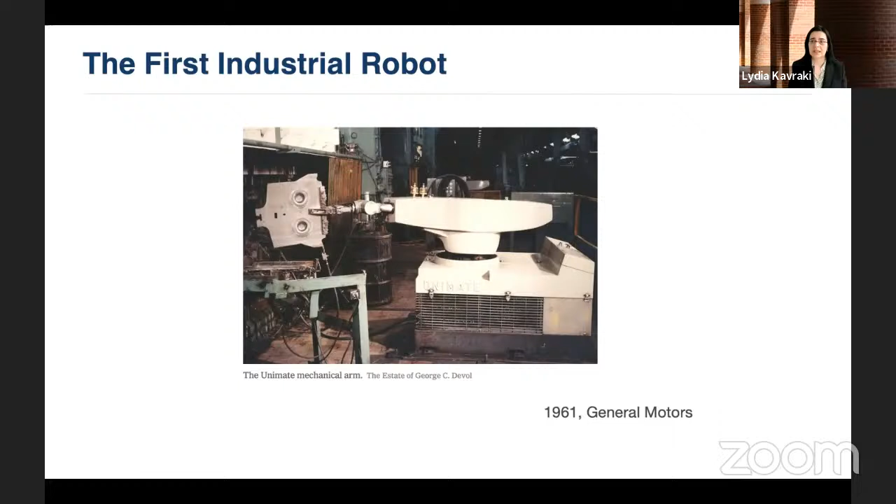However, the concept of automata is a very old one, about 3,000 years old. In the Iliad, Hephaestus, the god of metalworking and fire, created automatic tripod carts to deliver nectar and ambrosia to the gods and goddesses on demand.

Talos is also attributed to Hephaestus. A mechanical colossus made of bronze was imagined in the Argonautica. Talos patrolled the shores of the island of Crete, throwing boulders at invaders.

In his treatise Automaton Making, the mathematician engineer Hero of Alexandria describes a fully automated puppet theater that through a combination of displaced grain, axles, levers, pulleys, and wheels could enact an entire tragedy.

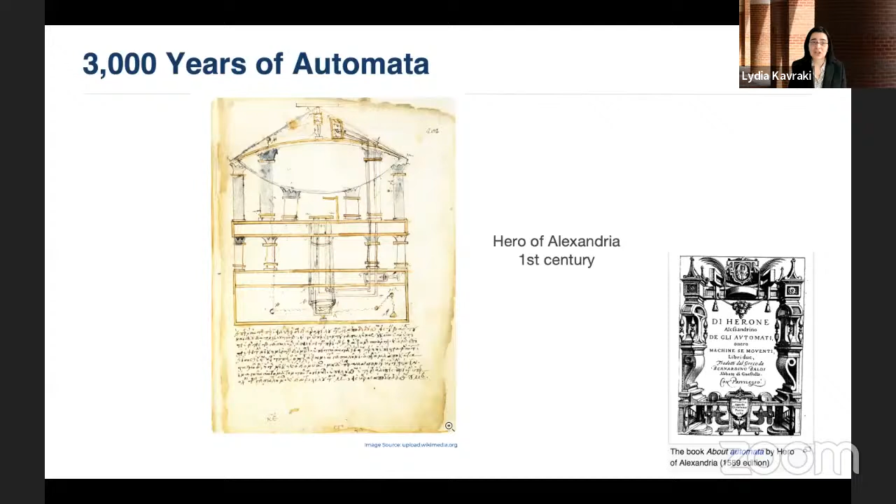Fast forward to the Renaissance, Leonardo da Vinci drew up plans for a robotic knight operated internally by weights and pulleys. In the 20th century, when industrialization became a reality, the word robot was coined in the 1920 play RUR, Rossum's Universal Robots, by Czech writer Karel Čapek.

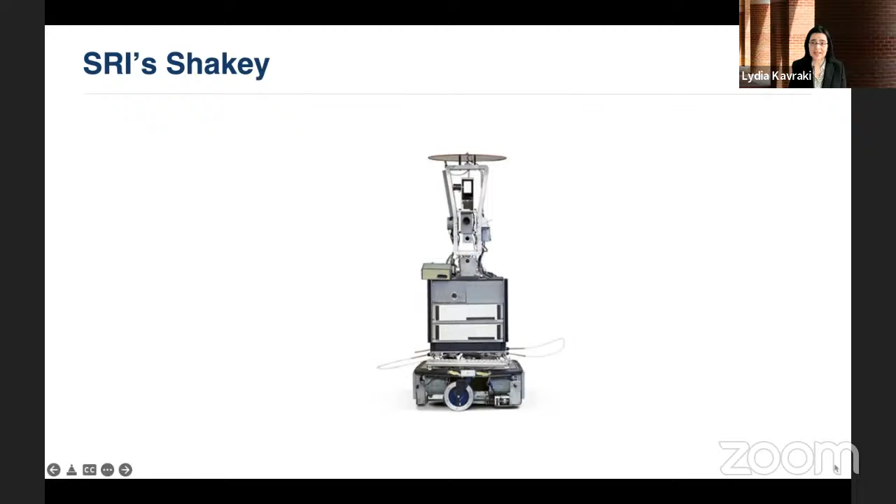Shakey was the first mobile robot with the ability to perceive and reason about its surroundings. The subject of SRI's Artificial Intelligence Center research from 1966 to 1972, Shakey could perform tasks that required planning, route finding, and the rearrangement of simple objects. The robot greatly influenced modern robotics and AI techniques, and now it resides in the Computer History Museum.

Today, robotics is one of the most disruptive technologies. Robots have already made great inroads in the automotive, semiconductor, manufacturing, and fulfillment sectors. Robotics is now poised to transform virtually every societal sector, including national security, agri-food, maritime, environment protection, infrastructure inspection, emergency response, logistics, transportation, healthcare, entertainment, and the arts.

So the transformative power of this technology has prompted several reports and roadmaps in many countries, and I will encourage those of you who are interested in the topic to have a look at them. From Internet to Robotics, a roadmap for US Robotics 2020 edition, followed earlier roadmaps in 2013 and 2016 in the United States and was a collaborative effort of several roboticists from academia and industry.

The Robotics in the AI Era, a vision for a Hellenic robotics initiative executed under the auspices of HIAS, the Hellenic Institute of Advanced Studies, which co-sponsors this webinar, speaks more to the Greek idiosyncrasies and reality.

From the HIAS report, I quote, "The global robotics market was valued at $62 billion in 2019 and is projected to reach $189 billion in 2027, growing at a compound annual rate of 13.5%. The market grows to 15.7 trillion by 2030 if artificial intelligence is considered."

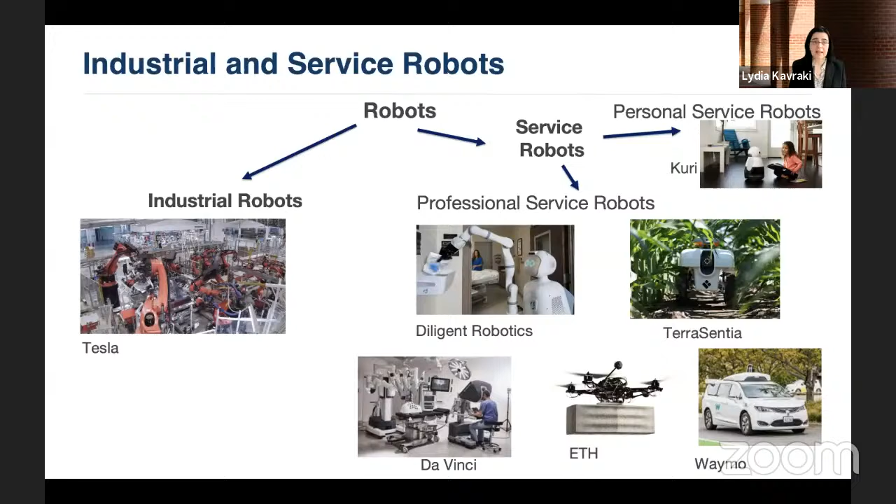Again, from the HIAS report, contrary to industrial robotics, which is rather mature, the service robotics sector, unmanned aerial vehicles, healthcare, logistics, and agri-food robotics is in its infancy and fast rising. Professional service robots is a 27 billion market worldwide and is growing at an annual rate of 30%. Furthermore, 20% of all service robot companies are young startups. This creates an exciting opportunity for aspiring Greek innovators to enter this young and fast-growing field and modernize the economy towards Industry 4.0.

In this very short webinar, we have asked outstanding Greek scientists of the diaspora who work in robotics to give us a glimpse of their work and the things to come. We have also asked the Greek technologists and leaders in the industrial sector to discuss their efforts in Greece. We focused on advancements in aerial robots with talks by Alexis and Dimitris Stefanakis, autonomous vehicles with Margarita Chli and Katerina Fragkiadaki, social and rehabilitation robotics with Panos Artemiades, robots used in agriculture with Stavros Vougioukas, industrial robotics with Evangelos Theodorou, and underwater vehicles with Michael Triantafyllou.

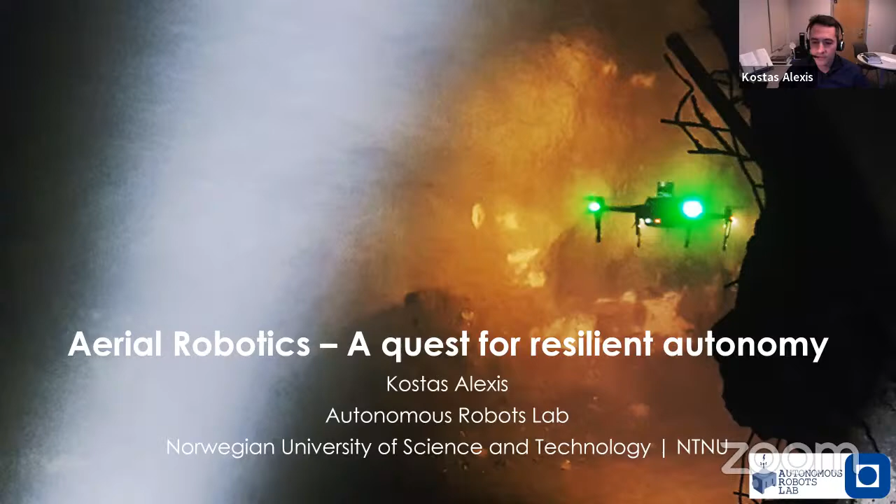I'm going to discuss aerial robotics, and I'm going to make the claim that the key aspect, and I think Lydia before outlined this also, the key aspect for service robots of that type to be ubiquitous relates to a set of challenges, and the part of the work that I'm going to focus on today is how we enable autonomy and a resilient autonomy in these conditions.

Flying robots are now employing diverse configurations, from classical multi-rotor systems, as we are all familiar with now, what we typically call a drone, to fixed-wing systems with long endurance, custom designs specific for industry, and so on and so forth. But they are tasked to operate in very diverse and challenging conditions with perceptual degradation and other limitations that hinder the ability to operate autonomously.

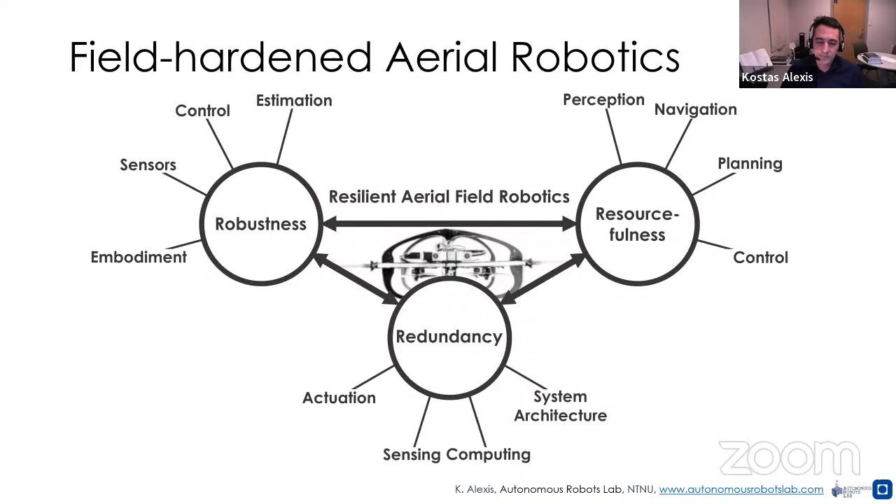If I was to make a plot of what aerial robot autonomy relies upon, I would say it has to have three features: robustness, in terms of having the same performance across conditions; redundancy, in terms of actuation, sensing, and being able effectively to have the ways to operate against every error and in every condition; and resourcefulness, in the ability to find a solution despite the challenges faced in all the other loops and functional subsystems.

It's massive. But they also have low texture and visual obscurance. They can be dark, they can have smoke, they can have dust, and so on and so forth. There is no access to communications. So we're really talking about autonomous systems. I'm going to present the main part of the work that relates to our contributions, but the whole context is made through a large team and international collaboration that involves many partners.

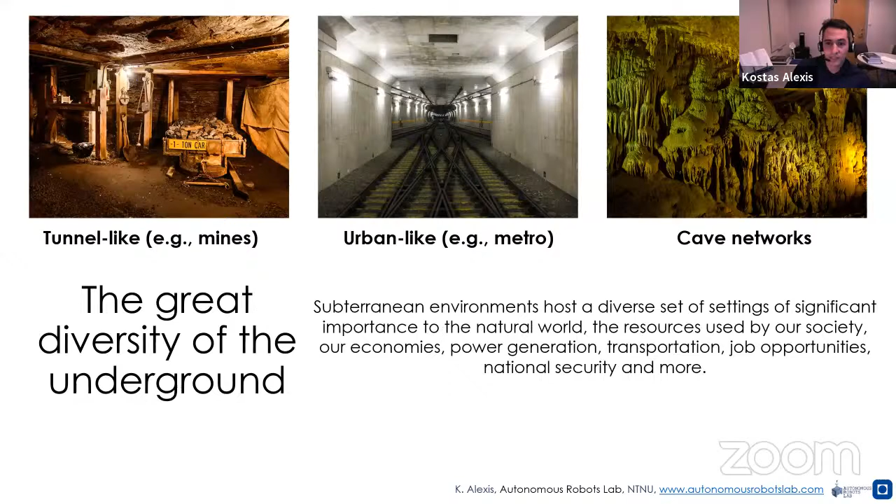And the name is inspired by ancient Greek mythology, so it's called Cerberus, by the protector of the underworld. I got to know through this endeavor that actually underground domains are particularly important for the world and the society, and also very diverse. So we have tunnels and tunnel-like environments such as mines that give us the resources, urban underground infrastructure that allows us to transport, and of course, the magical world of cave networks.

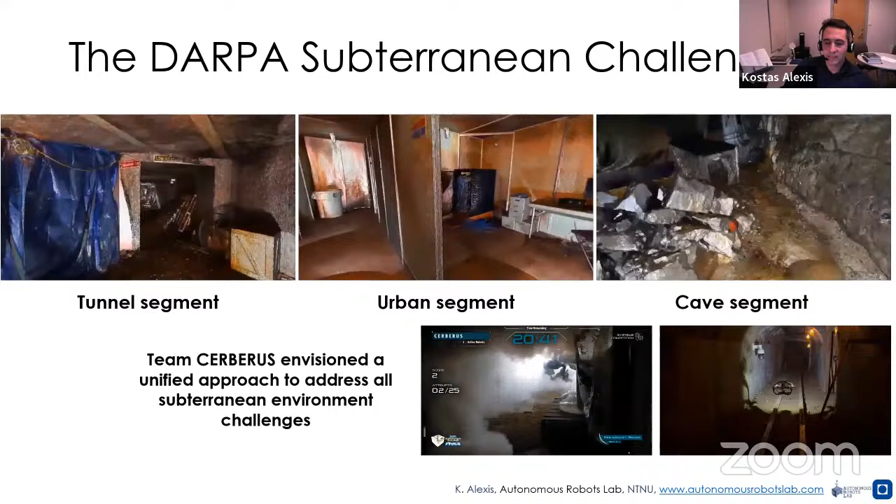DARPA, the US Defense Advanced Research Projects Agency, implemented a challenge analogous to the previous, like the DRC and the Urban Challenge, where robots had to explore and map and find objects in this type of diverse environments. In the final event, teams were tasked to explore parts that look like an underground mine, parts that look like an underground urban environment, and parts that were part of a natural cave. And we deployed a system of systems involving flying and legged robots. Legged robots were based on our collaboration with the team from ETH Zurich.

To approach the problem, and we think it's necessary, and this is what I want to coin here, you need to perform holistic research across the domains of dexterous design of robotic systems and agile flying robots, resilient perception, resilient autonomy, alongside the remaining task-specific work such as detecting objects or enabling, of course, communications throughout. That's a picture of the systems we deployed in this competition. And again, I focus here on the flying part, although the legged robots played a particularly important role at the final event of the competition.

Flying systems, speaking in terms of what are the core challenges, I think there are three. The embodiment has to be resilient, perception has to be resilient, and autonomy has to be resilient. A key aspect in our experience that allows for resilient embodiments is to make a design that is forgiving to last resort errors that can always happen. For example, that in a very confined environment, we can always collide a little bit with the world. So collision tolerance and other compliant designs are the means to facilitate such resilience.

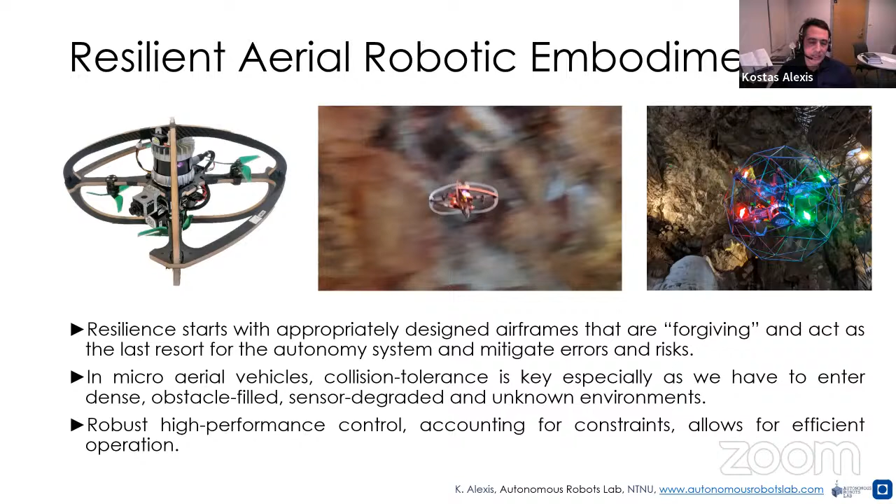And if such a design is available, then we can build upon the more important functional autonomy loops that allow it to operate on its own, search, characterize, and explore unknown environments. These are some instances from previous robots of my team. People, of course, traditionally have worked for a long time on control systems, flight control for these systems. And in my team, we employ a particular methodology called model predictive control.

But very recently, we ourselves and many other colleagues have explored the potential of implementing and designing a control policy directly from data, allowing the system to directly also avoid the obstacles in the environment without having to undergo the intermediate representation of building a map, which allows us to be particularly reactive and navigate with safety in an environment, even in the absence of complete localization information, which is what this little video on the right demonstrates to you.

Beyond control and embodiment, I mentioned perception is a key challenge. GPS-denied navigation is something that colleagues in the research community have explored heavily, either using LiDAR sensors or visual cameras and so on. My focus the last years on this topic related in particular to what we call perceptual degradation. And what we faced in the Subterranean Challenge, but also in other conditions especially relevant to industry in the real world, is that robots do not operate in environments that are benign with simple features and good visual conditions, but they can be simultaneously GPS-denied, dark, low texture, with smoke and fog and mist, geometrically self-similar, multiple kilometers in size, but at instances extremely narrow.

To allow resilient localization and mapping based purely on onboard sensor data for flying robots, we have developed a multimodal localization and mapping pipeline that first of all implements the sensors, which is a lot of effort in the hardware, as Lydia mentioned, to miniaturize everything for a small flying robot, to be able to see through degraded conditions. And here you see the benefits of thermal navigation, where the robot is unaffected by the presence of strong clouds of dust around it.

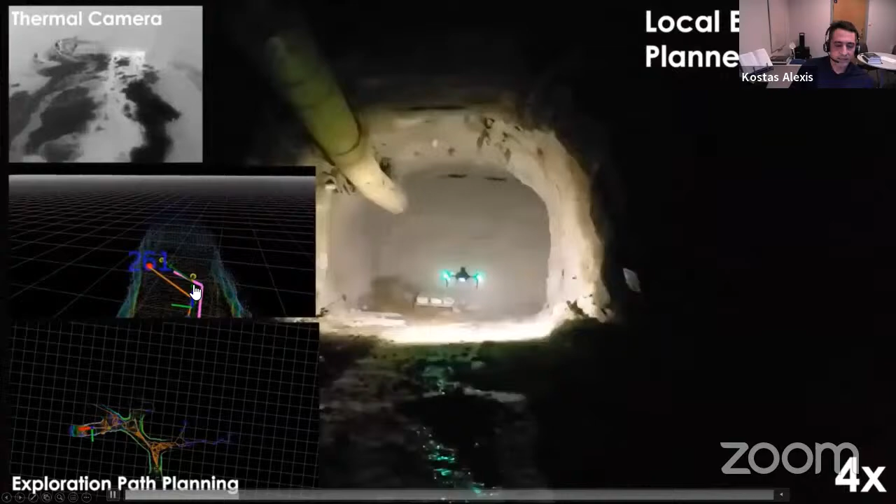These are instances of these results where you see one of our flying robots exploring an underground mine in Nevada. And you see the thermal data and the visual, and the LiDAR data. And these pink paths are the paths that the robot has identified to navigate on its own in order to explore the remaining of the environment. And the robot eventually, by the end of the battery life, makes sure to come back to its origin and deliver the data to the people that wait for it outside the underground mine.

This methodology in perception and in path planning was the core, the autonomy core of Team Cerberus, and in the final event of the DARPA Subterranean Challenge allowed us to win the competition, a result that I'm proud of, not for myself mostly, but for my team as a whole, which managed to compete and win against teams from NASA and MIT, Carnegie Mellon, and others who had an inferior score in the last stage of the competition. And this was truly a big challenge for systems walking or flying to be resilient and autonomous throughout. And it involved 3 challenges with different geometries at any time.

In this map that allows to see the whole picture, you see 4 robots with 4 names, Cerberus, Chimera, Camel, and Cayman, taking paths in this complex underground topology and exploring these worlds. And eventually they deliver the map, but also the location of objects of interest in this map. And just for what it's worth, getting a point in the competition related to detecting an object correctly, reporting back the location with an error of up to 5 meters. So it was a task about navigation in austere conditions, mapping and detecting objects of interest.

And the combination of walking and flying reflected the fact that ground systems, of course, have endurance, walking systems have dexterity against some terrain, but at the end of the day, when you have to go vertically up, get the bird's eye view, you also need the flying systems together. So that was a team that involved multiple robots, and this is the whole combination of robotic systems that Team Cerberus deployed through the 3 years of the competition.

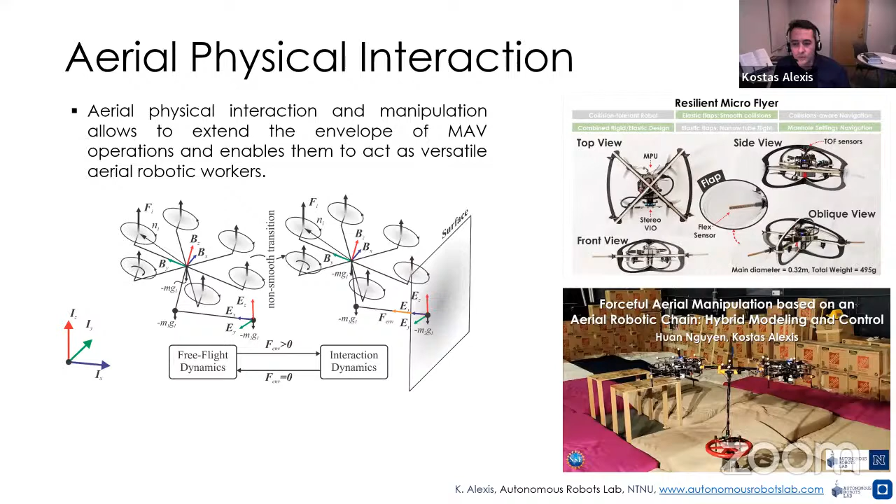I want to close my talk highlighting that remote observation and mapping or search for objects is one thing that flying robots can do. It's really not the only one. And what you see in these videos is that we can, of course, exploit physical interaction to navigate through very confined environments.

We are recently running a project that allows us to go through very narrow manhole settings where a human actually is able to navigate by just squeezing his shoulders, or to manipulate physical objects in the environment with a flying system. This is maybe not the most conventional application, but actually, if you think about it, it's very natural to the natural world, with birds, of course, being able to manipulate and interact with their environment.

And of course, beyond small flying systems, I have to give credit to the period of the research that I was at ETH, together with my team back then, when with traditional fixed wing designs, glider, we demonstrated the ability of a system to fly during the day, charge its batteries with solar panels, and sustainably cross the night, and then fly the next day, and fly the next day. And eventually we call this the idea of perpetual flight.

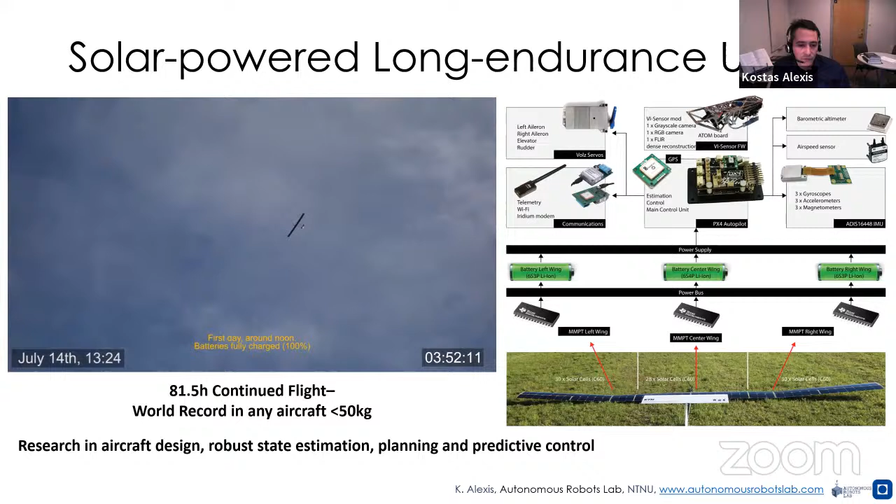So this robot that you see here, 5.6 meters in wingspan, 6.5 kilos in weight, demonstrated in 2015, 81.5 hours of continuous flight, which is still the world record for anything below the 50 kilo class for an aircraft. With that, I want to highlight that an important aspect is to try to push the community as a whole. So we try to open source a lot of our work, and many of our colleagues today, I think from the talks, also work in this direction.

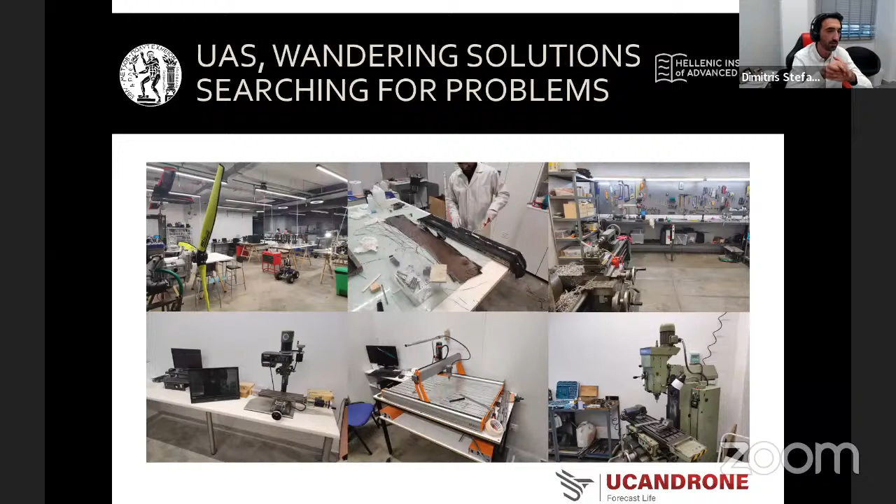Of course, as the Professor says, we are a vertical production line company, building and manufacturing, programming and designing advanced systems, and of course service providing, meaning that usually we have calls from professors like Mr. Kyriakopoulos asking for whatever payload or a pH measuring device or a thermal camera or whatever sensor robot, and the only valid answer that we can offer is, okay, Professor, what color do you like? This kind of work gives us opportunity to fly almost all over the world and be part of this unmanned system hype, if you like.

The committee challenged us to investigate and present the uprising challenges and of course opportunities coming along the digital transformation and AI in robotics. And the first thing that came into my mind is, oh my gosh, I'm heavily jealous and fond of all the students that we are speaking for today. They have the chance to see their work come to life and take action in everyday usage. And I think for sure there is no time like present. That's why I called this presentation the Wandering Solutions for a reason.

In my area of expertise in the last 3 or 4 years, we are searching problems or clients, if you like, to propose our drones as panacea. And that's why I didn't want to wear the tinkerer's hat today, but I really liked to give a business development aspect of these opportunities. So silly guys like me love to explain stuff in a history manner. Thus, I only have 8 minutes or so to explain the evolution of robotics from a business aspect and how all these thoughts come together, and I hope you might find it useful.

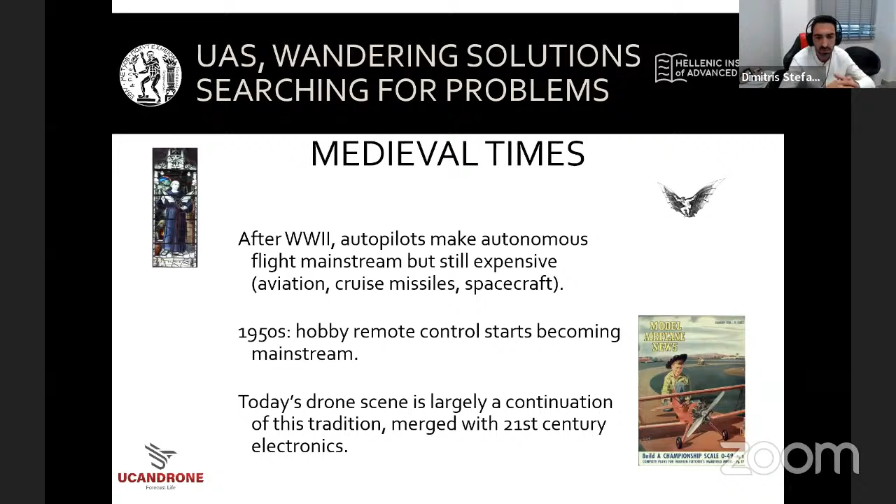But after that, we have some medieval times where, after the war ends, the remote control hobby came mainstream. And actually, if you think about it, today's drone scene is largely a continuation of this tradition, but with better electronics, of course. Like every history, we have the Renaissance.

In the 90s, GPS came mainstream. We have the mobile phone hype, and of course, the internet maybe facilitates the open source movement, or at least I can send a colleague of mine a message and they can answer. But we're not there yet. Why? Because we have the age of enlightenment, and of course, we can get hands-on some real energy.

Because of the battle of mobile phones, we have inertial and other sensors and GPSs that are small enough and cheap enough to use. And for the first time, last but not least, we have processors that we don't use for heating ourselves, but they can actually process.

So around 2005 or 2009, somewhere in the middle, we start having all this hype about drones and all this open source initiative for flying drones, for USVs or UXVs in general, that we can play with and use or make a hobby out of them. And of course, academia embraced them and started to use them a lot.

So as I said in the beginning, there is no time like the present. Nowadays, we can get hands-on with whatever device you can imagine. You can have sensors of any kind, and you can just imagine a solution and make it the other day.

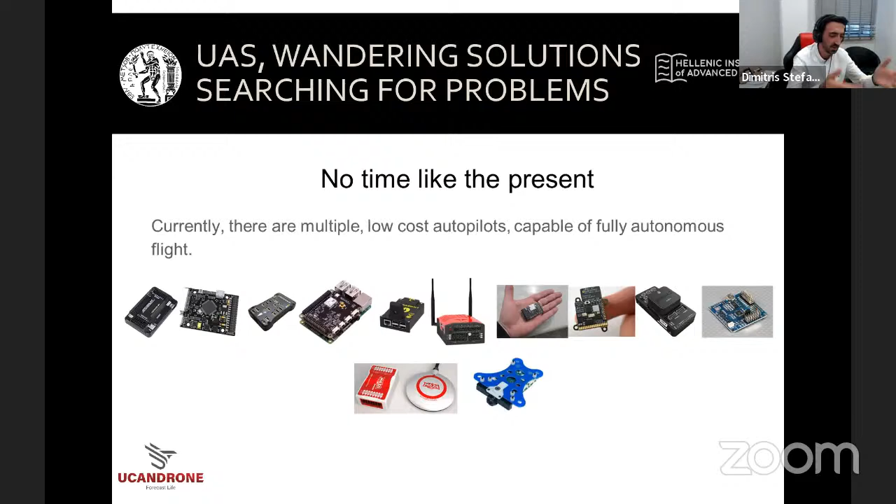But after all this perfect storm, after this 'there is no time like the present', we sat down and started narrowing down to the tool, not the solution. We heard about coding, AI and buzzwords like machine learning, etc. So we narrowed down to the code or something, or we said, of course, we need more miniaturized electronics and better sensors, etc. So we started to narrow down to this aspect.

Or guys like me said that, okay, all of you can't do anything if you don't have a beautiful, shiny platform like mine. And everybody looked at his discipline without looking at the solution. And once we found this panacea, we handed it down to everyone who's willing to pay for it. So this gets me to my favorite slide.

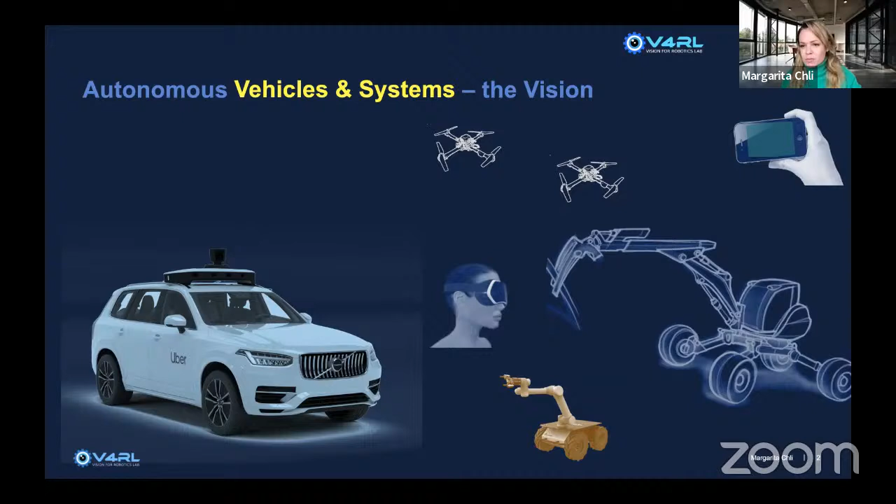And at the Vision for Robotics Lab, we are aiming to basically use the onboard sensors and the onboard computation in order to automate their navigation in space. So we want to develop this robotic perception and intelligence for platforms such as the ones that you see here, in order to enable their safe navigation in space without colliding with their environment and actually performing a useful task.

And the vision would be to take this a step further, even to have a portion of this team, or all of it, if you would like, to collaborate in a team to perform a common task together. Now, again, a team like this or a sub-team of such platforms, you can imagine that it can be very helpful for different tasks. Whether one wants to digitize an archaeological structure, to have a team to help in search and rescue, or to inspect the power plant or monitor crops, then robotic perception and systems can have a lot of impact and have a lot to offer.

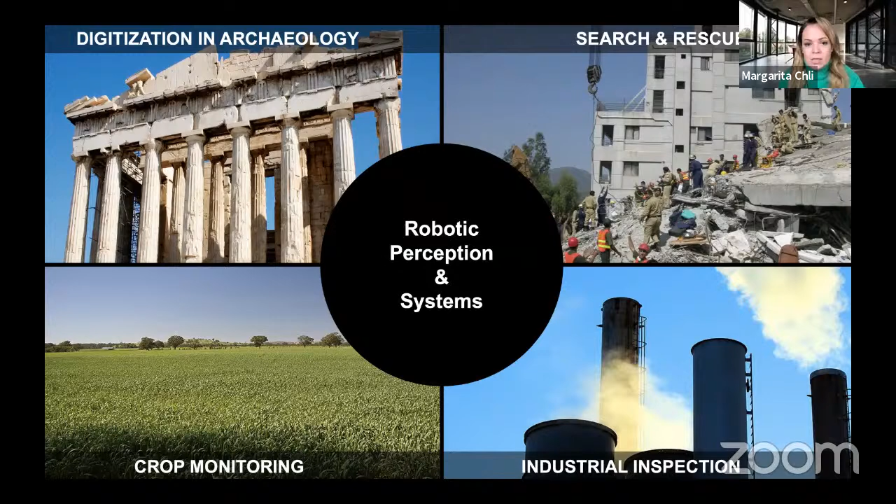So back to our vision. So in order to achieve this vision, to have a team like this that is able to assist us in tasks as the ones that I showed before, then we have quite a few challenges to address. And for the purposes of this talk, I've partitioned these challenges into three main topics, basically. And these also represent the three main research streams in my lab. So I'm going to go through them and explain what I mean by these challenges and give you a taste of some of the works that we are doing to address them.

Right, so what do we need for our autonomous vehicles and systems? First of all, we need them to be able to robustly estimate their ego motion in space, and also estimate what this space, what this scene looks like. Then we want them to build on top of that a level of intelligence, if you'd like, to perform scene reconstruction such that they can interact with their scene, and also path planning in order to perform a mission like drive from A to B autonomously.

And once we have robots able to address challenge 1 and 2, then we would like to exploit the fact that multiple robots might be deployed to perform a common task in order to do multi-agent collaboration, okay? Right, so let's look a little bit into what we mean with ego motion estimation. I'm glad most of you have knowledge of Greek, so you can understand what ego motion means just by reading that.

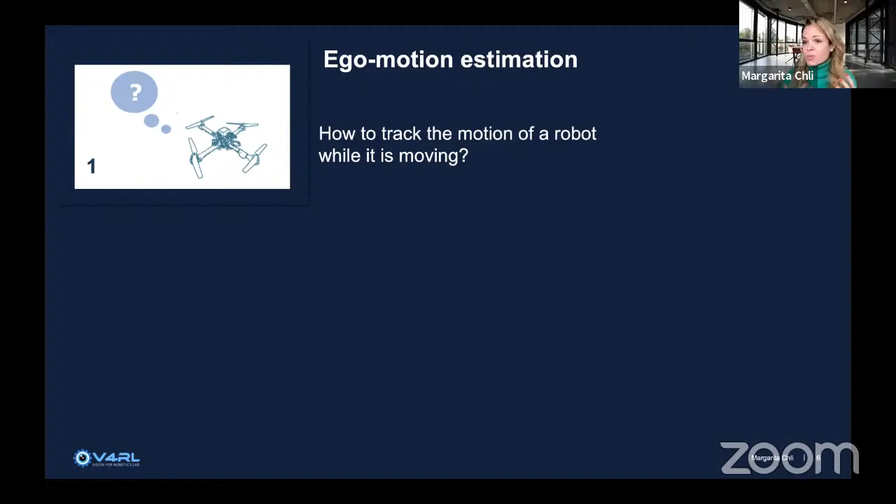But the main idea is how to track the motion of the robot while it is moving. And when you pause and think about this for a minute, you might say, you know what? I know what I'm going to do. I'm going to strap my phone on the robot that I want to track. I'm going to switch on my favorite Maps app, and I'm going to keep tracking where my phone, and hence my robot, is within this map, right?

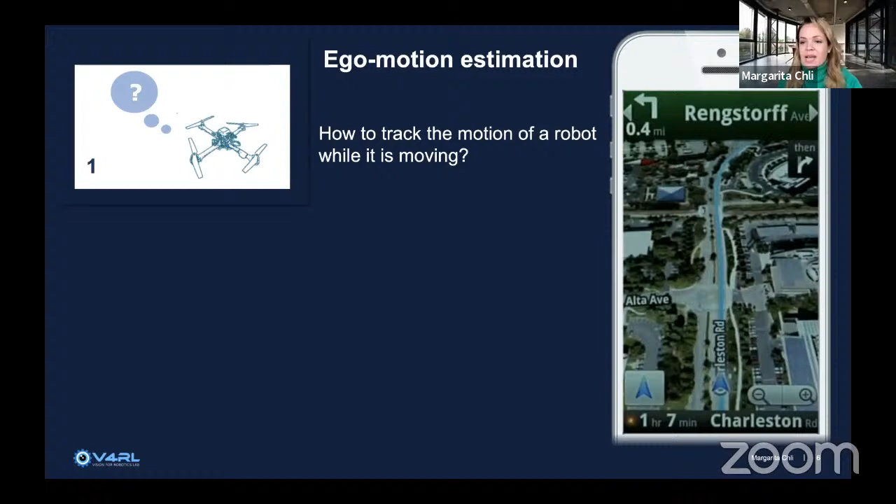But of course, this has quite some assumptions underlying there. So for example, we assume that we have a good localization estimate and a good estimate of what that map looks like. And of course, you guessed it, we cannot always rely on a good localization system, for example, indoors, and we cannot always rely on a good map because the world changes, buildings get demolished, new ones get built, right? So how do we do this? Well, we use onboard sensors, and I invite you to think about the sensors for the moment, or the rest of this talk if you'd like, to be a camera.

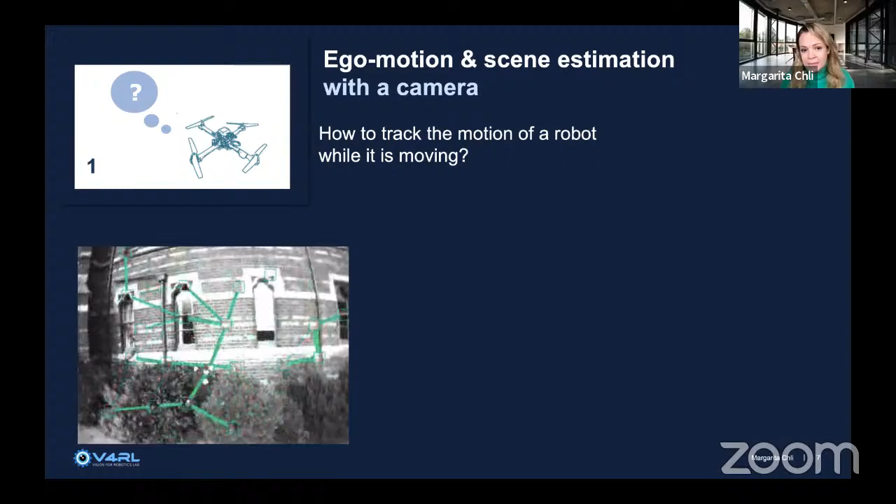And the answer is that typically in the robotic vision community, we pick natural scene features, these patches that you see here on the left, to serve as landmarks in the scene. And judging how these patches, how these landmarks move in image space from one image to the next, we start reasoning about the motion of the camera and hence the robot in 3D, as you see there on the right. And we call this task simultaneous localization and mapping.

And for short, in the community, we refer to this problem as the problem of SLAM. And that's exactly our first challenge: how can we robustly perform SLAM for our robots? So here is an example, and now, my God, this work is 10 years old. It's the first time that we were able to show that we can automate the flight of a small aircraft like this using a downward-looking camera and an inertial sensor.

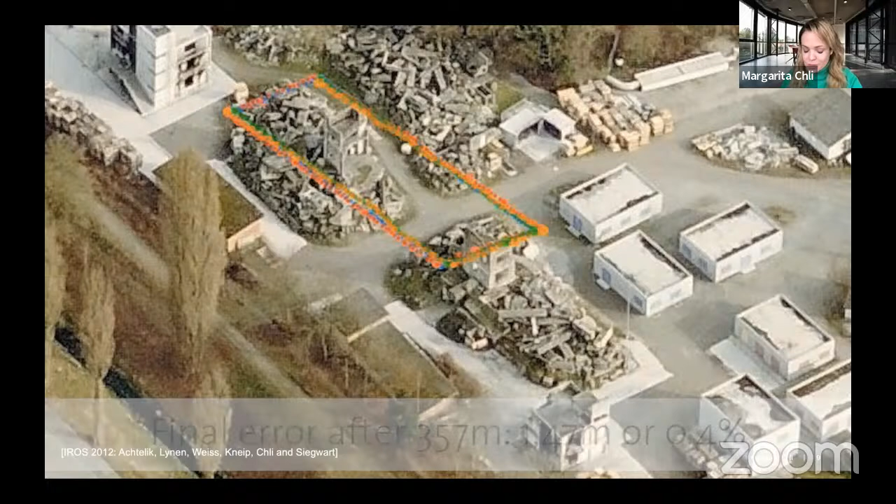So here you can see the view. The map that the robot is building is very different from your typical maps that you use in your favorite apps, but it's enough to localize where the robot is and how it is moving in space. Now, in order to capture a video like this, there has been a lot of tuning happening, which brings me, of course, to the point that while we can see a very nice video like this, autonomy is still a big challenge. And for this reason, we resort to different research directions. One direction is to experiment with different sensors.

For example, event cameras. Event cameras are inspired by human vision, by biological vision, if you'd like, and they capture changes in the intensities of an image. And what is great about them is that they can give us an insight into what happens in between traditional camera frames. They don't give us frames, they give us events, just to tell us where these little pixels are changing in the image. So if I was moving in my video here, you would be able to see just the boundaries of my figure.

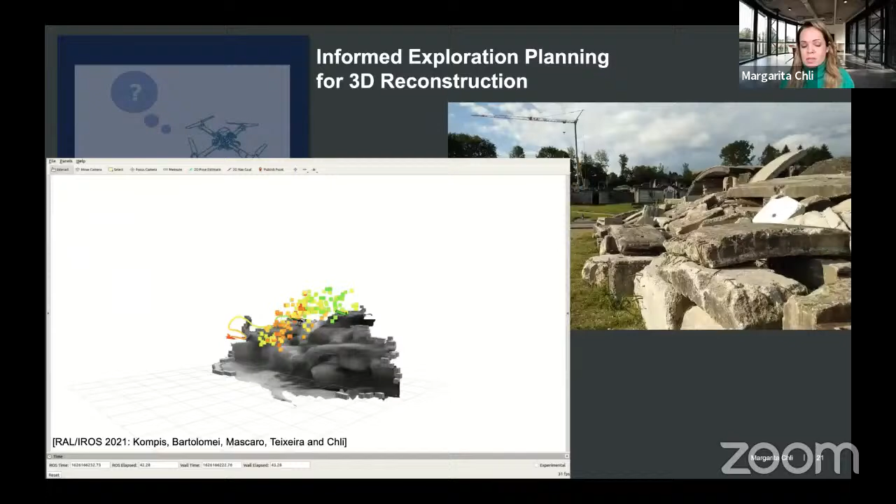And it is with maps like this that then we can run automation, path planning missions, like what you see here. So in this example, the drone is tasked to cover, 3D reconstruct the area that it is looking at, and the squares that you see there in different colors are evaluations of poses in the surroundings of the drone that we believe will be informative. And let me share with you a little bit of an insight into how this works.

We present a path planner for 3D reconstruction of large scenes for an MAV equipped with a gimbal-actuated camera. Potential next best views are sampled from the MAV's configuration space and ranked by their expected information gain. The information gain of a proposed viewpoint is calculated with a raycasting operation and encodes visibility of frontiers, visibility of unknown space, as well as quality improvements of the reconstructed surface.

So with works like this, we're able to push what we can do in terms of quality of reconstructions, but also speed of reconstructions. And within the same umbrella of trying to build more intelligence into our robots, we also use semantics. We can also use semantics when driving a robot from A to B, for example, to avoid areas that can be difficult for a robot to perform its estimates of ego motion and scene estimation.

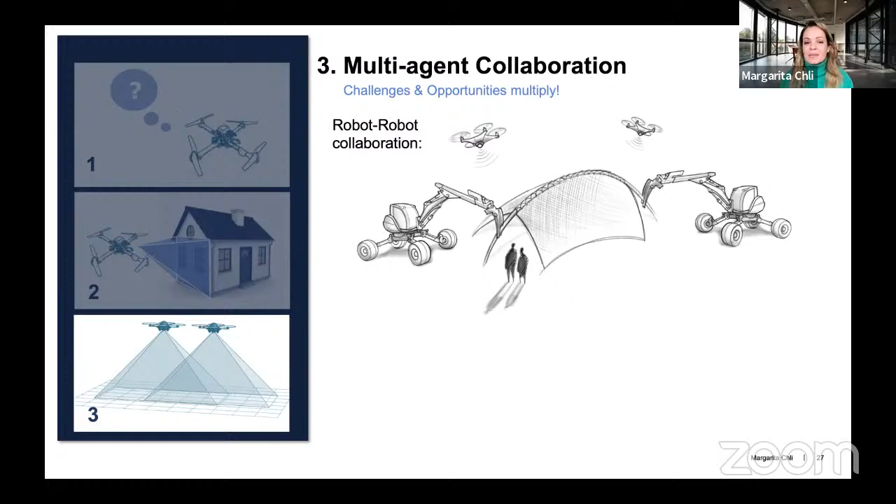And when you think about multi-agent collaboration, where we're going with this, sky is the limit, right? So you can think about robot-to-robot collaboration, as we've seen with drones in this video, or human-to-robot collaboration to perform tasks together. And I argue that with these three challenges, we're aiming to push robotic perception and collaboration, because we believe that these are key to pushing robotic autonomy.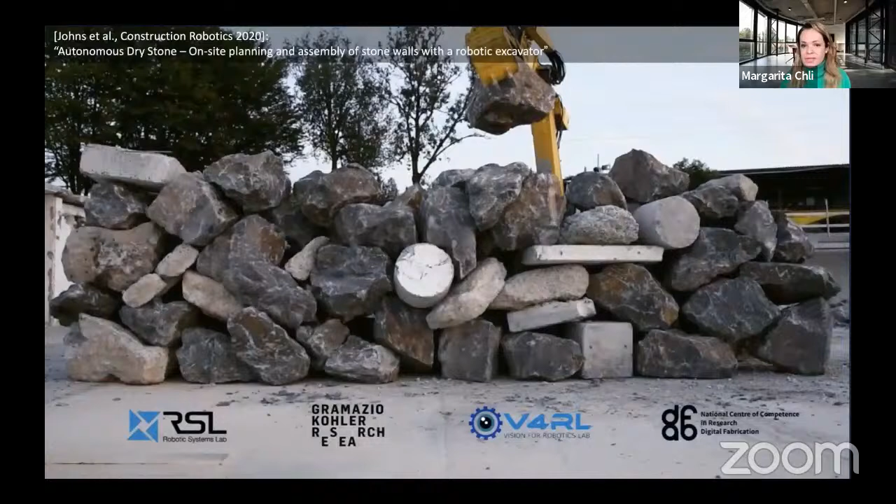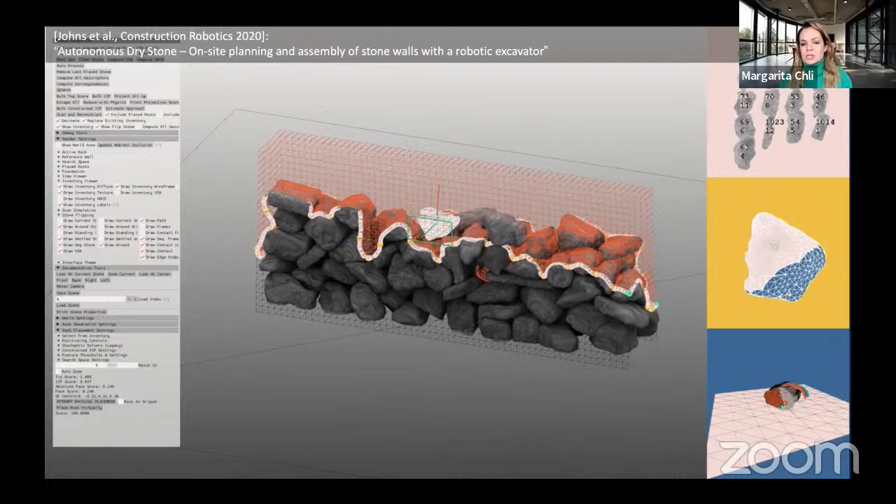And I have one last video to show you with this autonomous excavator. I think it's pretty interesting to see. This is a joint effort by roboticists and physicists and architects. We joined forces to use basically an autonomous excavator equipped with lidars and cameras to build a wall out of locally sourced stones like these. So we are scanning the environment, and then we're using a physics simulator running in the background to figure out how to place these stones such that we're able to build a freestanding wall using this autonomous excavator.

And within the course of several days, we were able to build a wall. You're going to see it in a minute. It doesn't look very nice, but I think it's interesting to see what robotics can do, what robotic autonomy can do. And imagine having had two robots able to build this, right? All the challenges and opportunities that would have to go on there.

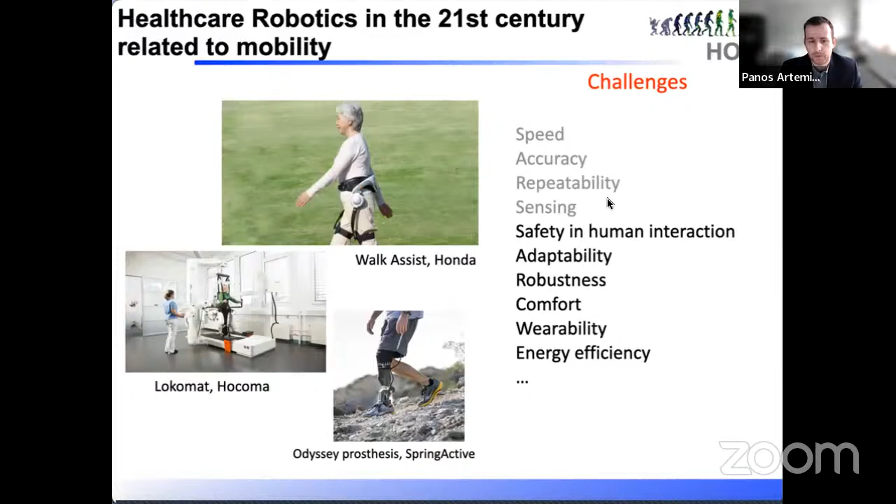And, of course, energy efficiency. Nobody wants to be plugged into the wall when wearing a robotic device or a prosthesis. So we're talking about batteries and energy efficiency of those robots. So definitely the challenges in robotics have evolved through time, especially as robots come closer to humans and are worn by humans. How important is this problem? How important is the problem of mobility and how can robots help with that?

So we're talking about an aging population. And of course, we're talking about mobility problems. And let's see how robots can help with that. It's not only aging, it has to do with stroke and any kind of cardiovascular disease.

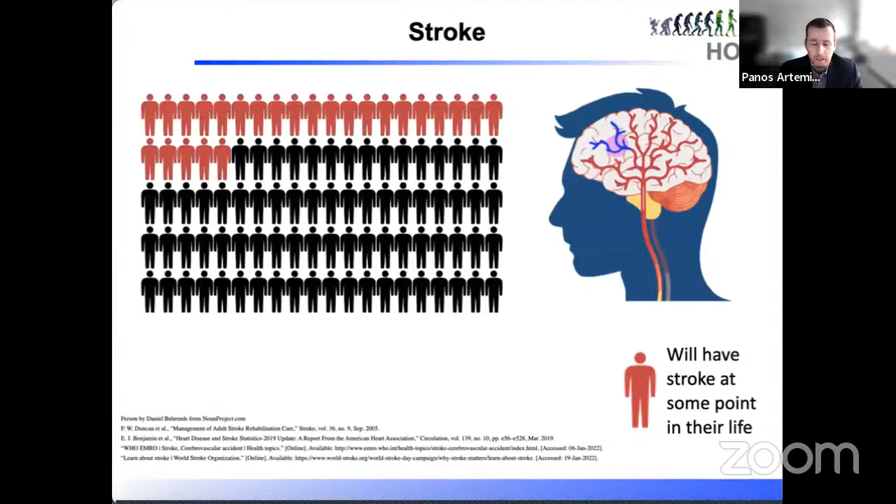That mobility is affected. If this figure here on the left represents the world population over 25, unfortunately about 25% of them will have a stroke in their lifetime. And a third of them will unfortunately die due to complications of stroke. And the remaining 2/3 will need some kind of assistance and some kind of rehabilitation. So the question is how robots can help with that.

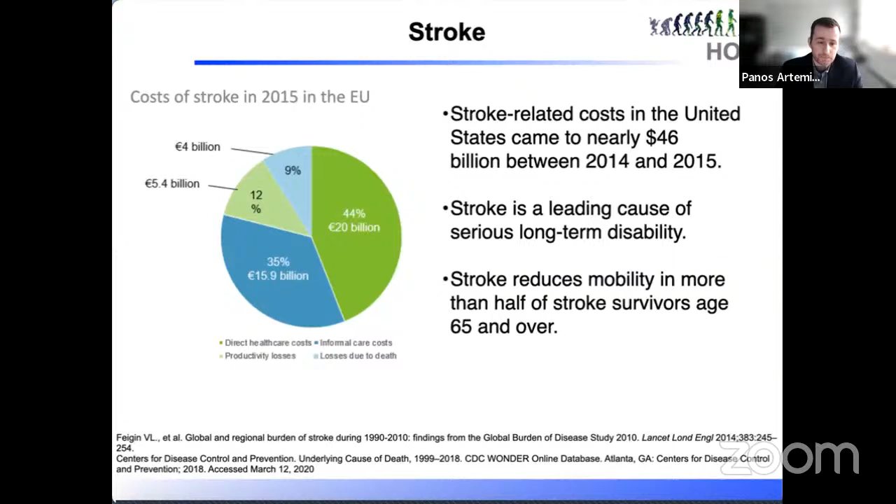The numbers in the US are even worse. As you see on the right here, we're talking about $46 billion in only 2014, 2015. So robotics can definitely help. Now that we have safer robots and we can work with controllers that adapt to humans, we can definitely help.

So along those lines, this is the mission of my lab, the Human-Oriented Robotics and Controls Lab, which essentially can be summarized in improving the quality of life and work by developing, modeling, and controlling robots that physically or cognitively interact with humans. We have done a lot of work with lower limb prostheses. I'm going to present briefly today mainly rehabilitation robotics, how we can use robots to rehabilitate after a stroke. And we have been doing a lot of work on how humans can interact with multiple robots through brain interfaces.

So starting with rehabilitation, the news is actually good for upper limb. This is something that started back in the late 80s with MIT Manus and the MIT group on how we can use robotic devices to rehabilitate upper limb motion. And this has been doing very well. Now there are multiple hospitals around the world that have robots that are actively used almost every day to rehabilitate patients for upper limb motion. And actually the latest American Heart Association report recommends robots for upper limb rehabilitation.

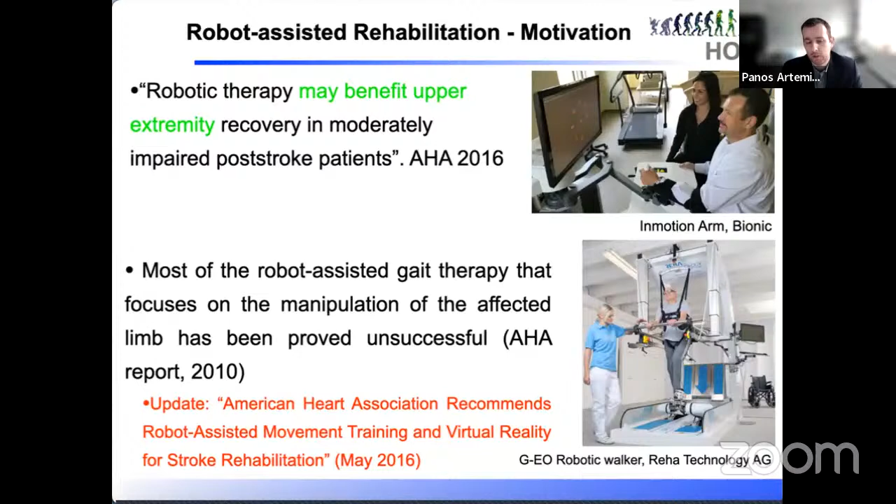Lower limb is a completely different beast. Walking is much more challenging, right? It has to do with balance, it has to do with transfer of weight. And unfortunately, the reports are not good so far. The robots that have been used so far in rehabilitation for lower limb have not been as successful as for upper limb. I would like to make a claim here that so far, all the robots that have been developed for lower limb rehabilitation have been passively moving limbs.

And we know from neuroscience and the neuroplasticity of the brain that this is not going to work. Passively moving the limbs in order for a patient to walk is not going to lead to rewiring the brain. The brain has a very nice property that has to do with neuroplasticity. It's able to rewire and reconnect itself or different regions of itself, but this cannot be done with just passive motion. So you have to engage in more dynamic, more forceful interaction with the robot in order to engage the brain and rewire it.

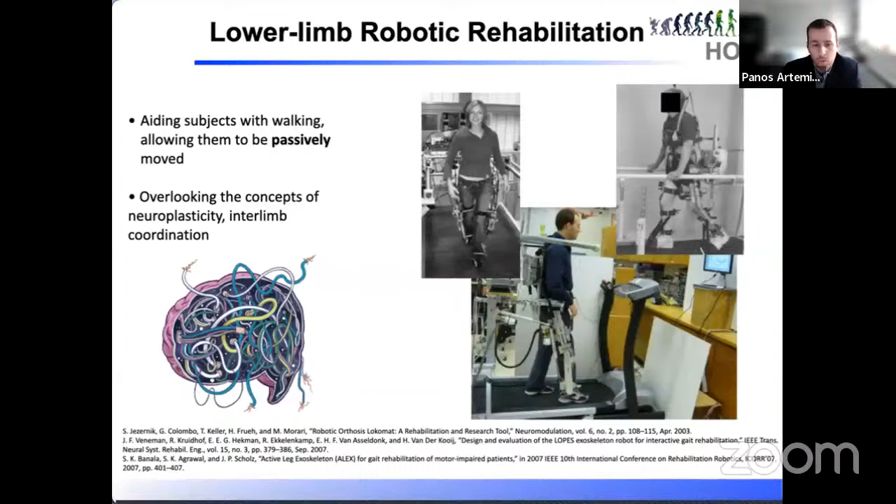So let me start with a goal, or really a bold idea that we had about 8 years ago: how we can provide therapy for the paretic leg. Remember that stroke is usually hemiparetic, so one of the two sides is affected, the other is still intact. So the idea was how we can provide therapy to the paretic leg by using physical interaction with the healthy leg. So now we're not messing around with the paretic side, we're actually engaging with the healthy side.

This is controllable in real time and has a wide range of stiffness. But as a mechanical engineer, I would like to be able to model what's really going on, apply controllers to that so that I have the optimum outcome, which is rehabilitation and better functional outcomes of gait. So lately, the past 5 years, we have been working on models, on neuromuscular models that really explain how the brain, how muscles coordinate for humans to walk.

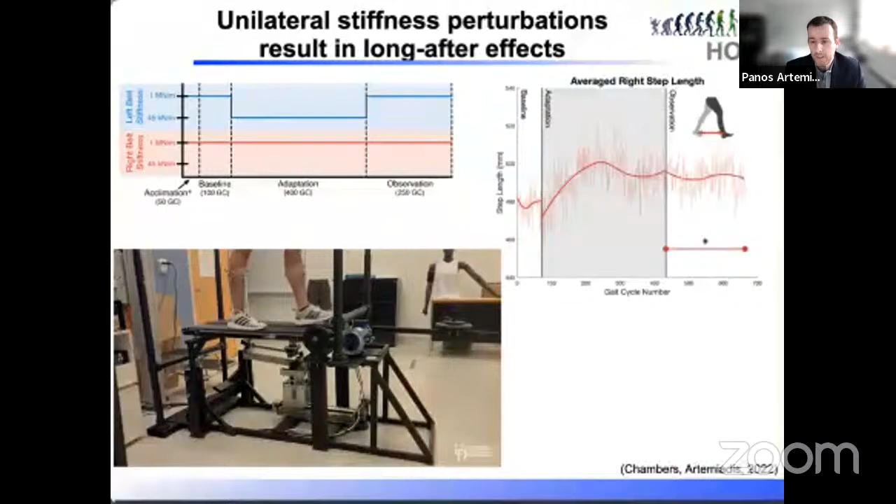So then we did the next obvious step, which is, now that we know the model of this process, can we try to optimize it to provide rehabilitation? So we did an experiment where we have repeated stiffness perturbations, and the holy grail in rehabilitation is the after effect. So you do this training session with your subject for 10, 15 minutes, 30 minutes. What's the after effect? They would just walk away in the lab and they just walk as bad as they came in. So we are focusing now on characterizing this after effect.

And this is the top right figure that you see on the slide. For the first time, we see an after effect that lasts for at least 200 gait cycles, 200 steps after we remove the perturbations. The best so far has been 10 to 15 gait cycles after you remove the perturbation. And now we see that by introducing this optimality of interventions and optimality of perturbations through this treadmill, you can see an after effect that lasts much, much longer. And our hope is to now transition to therapy for those stroke subjects so that they do this kind of session twice a week and they have a long-term effect with better functional outcomes for gait.

We're also interested in this idea of visual interaction and visual feedback. So we are also playing with virtual walls as they walk on the treadmill and want to see what we can improve in terms of functional outcomes on gait by also having some visual feedback.

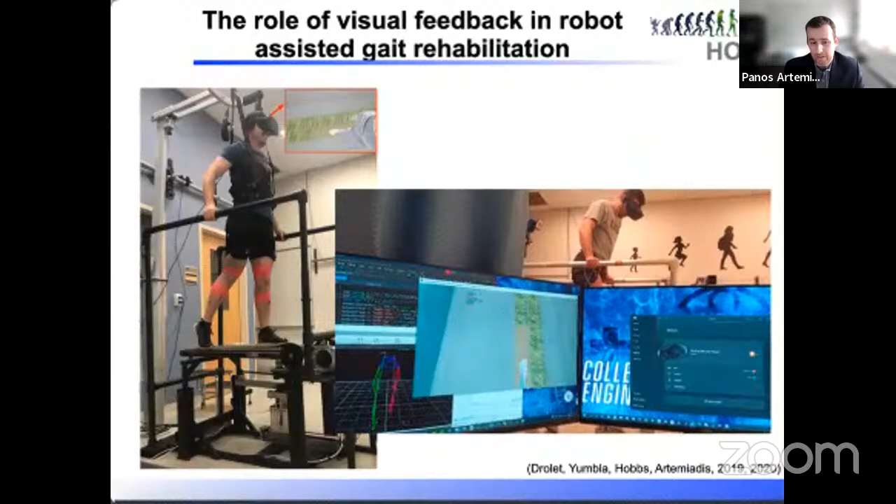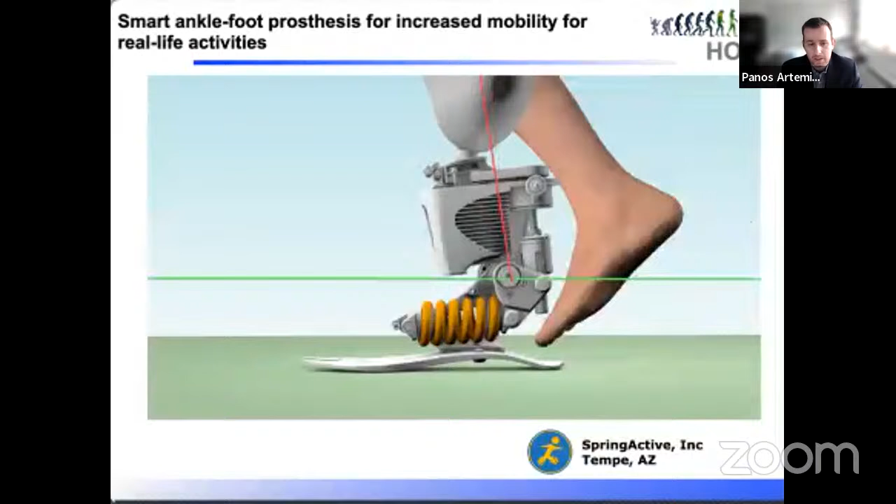So since I only have a few minutes, let me switch to the second project, which has to do with prosthesis. This is actually a collaboration with industry. NSF has these unique mechanisms to fund projects in collaboration with industry. So now we have partnered with SpringActive from Tempe, Arizona, for the controller development of their prosthesis. This is a lower limb prosthesis that they developed, and what we are doing is improving its controller so that it is robust in dynamic environments.

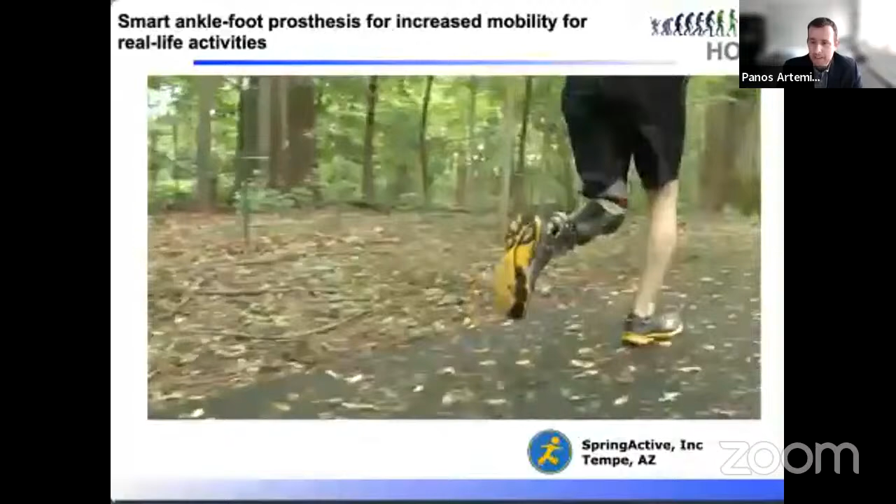And what I mean by dynamic environments is along the lines of this variable stiffness treadmill device that we have in the lab. What happens when you walk on very soft environments? Not only hiking on uneven terrains, but also very soft environments. So you can imagine yourself walking on sand on a nice beach in Greece, where you have a highly compliant, highly dynamic surface. What needs to be done with the control of this prosthesis in order to be robust and safe for the user when we transition between those dynamic environments?

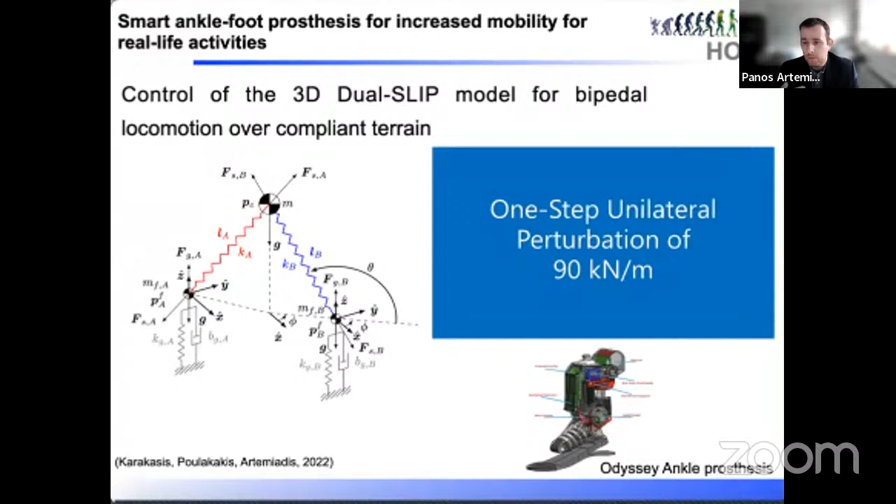So a work that actually was submitted literally a few days ago has to do with how we take a well-established model. This is called the 3D dual SLIP model that is mainly used in bipeds, in locomotion robotics. How we transitioned that model, how we extended that model to compliant surfaces, and how then we design a controller that's essentially an optimized LQR controller that had to do with pre-stiffening: you adjust the stiffness of the legs, and that proves to be robust and actually guaranteed stable in terms of walking on very soft surfaces.

We actually tested the system in simulation, and we saw that the range of compliance that you can achieve is really big. You can go to a surface that is about 30 kilonewtons per meter in terms of stiffness. Just to give you an idea, a very soft mattress, like a gym mat, is in the order of 60 kilonewtons, so we can do much softer surfaces than that. So this is a work that we just completed in simulation.

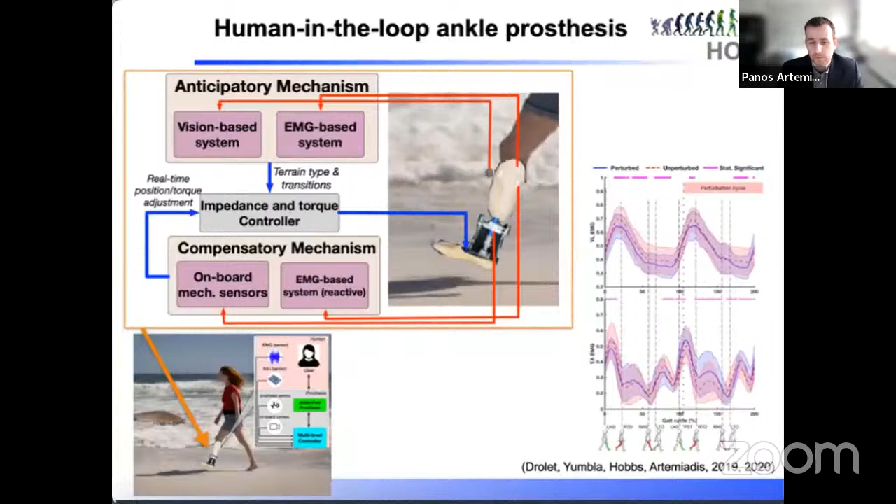Now we're transitioning to implementing that idea of pre-stiffening your leg into the actual prosthesis that we have in the lab. Lately, we have been also working on how to introduce the human in the loop, how we can use signals that are coming from the muscles of the residual limb when you have an amputation to intelligently control the prosthesis, again, in terms of transitioning to different surfaces and different compliances.

I will stop here by thinking about the future. What are really the challenges for healthcare robotics, and especially those robotics that have to do with mobility? One important thing is inherent safety. I don't want to wear a robot, or I don't want to have a prosthesis that will not be safe, even if it loses power completely. So we're thinking about safety, not only in terms of control, but also in terms of the hardware. That's why there's a lot of hype around soft robotics lately.

I'm a big supporter of the idea of model-based therapy. I think we need to go beyond the empirical formulas for medicine and for providing assistance, and go and do some really model-based work in order to optimize our interventions. And in terms of prosthesis, we need to think about controlling those prostheses in a better way to be robust in dynamic environments for everyday life tasks.

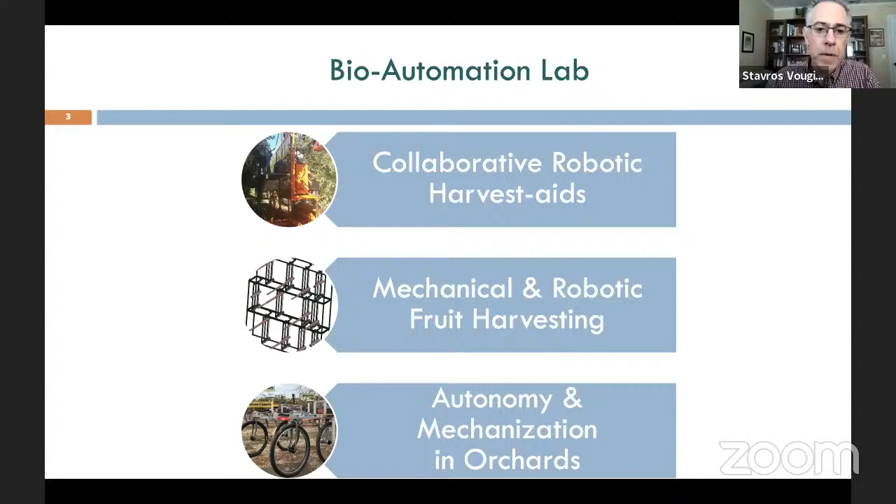So if you go and Google agricultural robot, which is what I did yesterday, and print out some of the images, you will see a lot of different robots out there that are intended to do harvesting, weeding, spraying or pruning, seeding, thinning fruits and flowers, fertilizing, transporting, anything you can imagine. You will find a robot that is aspiring to do that in commercial agriculture. Now, what is driving the need for all those robots? Well, these robots are offering precision sensing and actuation services.

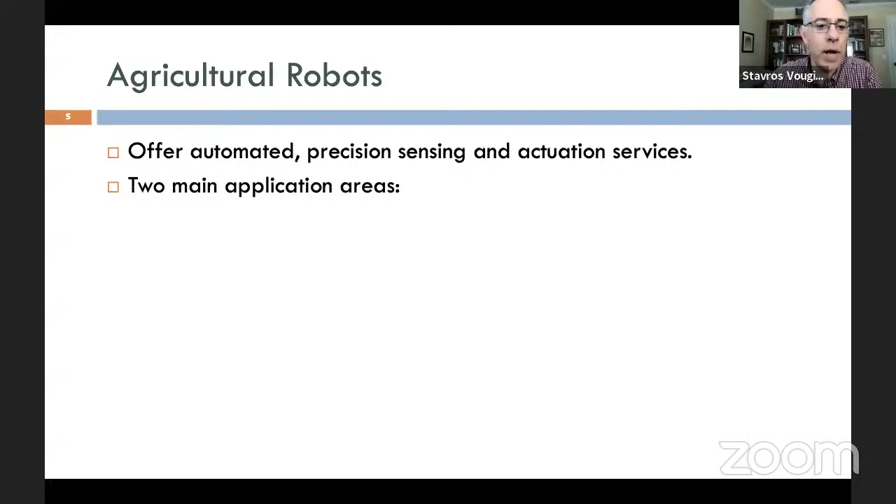And there are two main application areas for them. One is precision farming. Precision farming is about applying the right type and amount of input, for example, chemical, at the right time, at the right place. The goal is to maximize production, minimize the inputs, and do it in a sustainable fashion so that we reduce the footprint of the technology on the environment. So this is one of the major drivers.

The other major driver is the reduction of manual labor. This is a huge problem in most parts of the world. We actually need to either replace farm workers or work with them and increase their efficiency.

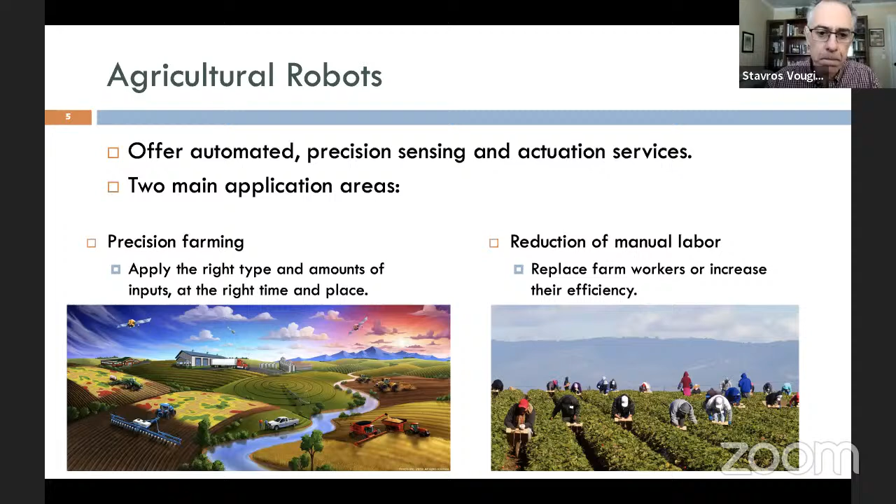Now, in terms of precision farming, and because I understand that some people in the audience may be interested in startups or in translating the research into industry, precision farming has two different domains. One is the large row crops, soy, corn, wheat, etc. This area is dominated by large equipment manufacturers, and automation is mostly embedded in their machines. And all of those machines are GPS guided because it's pretty simple to navigate in open space pretty much without any obstacles.

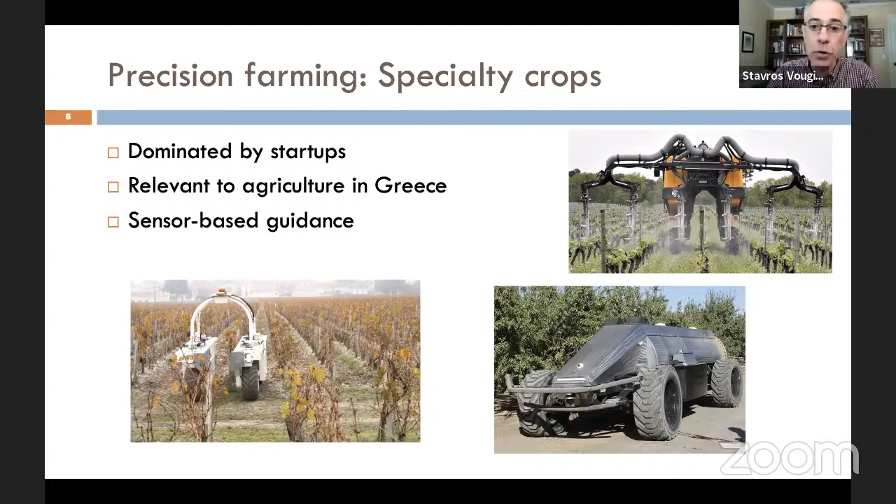On the other hand, when we deal with specialty crops, fruits, vegetables, vineyards, orchards, this space is dominated by startups, mainly because the market is very fragmented, but the challenges there are different. And I think that this is an area that's very relevant to agriculture in Greece because Greece is all about fruits and vegetables. And in this space, there are lots of companies developing different types of agricultural robots. All of those robots have to be sensor-based, sensor-guided, not GPS-guided, because they have to avoid obstacles, operate under dense canopies, so there is actually no GPS signal. So precision farming is one area, and then the other area that I will talk about is labor.

Now, when it comes to specialty crop challenges related to precision farming, we face sensing challenges. So the plant structure is typically very complicated, and there are problems with visibility. You can't see the fruit or the part of the plant that you want to treat. We also have a lot of biological and environmental variability in those crops, and we have a lot of complexity and variability of plant responses. So if you're building a robot that needs to, for example, take images to diagnose a certain disease and then apply the right input, it's not very easy to do so.

We also face actuation challenges because plant tissue can be easily damaged, and there is also huge variability in plant physical properties. So if you want to grab a fruit or cut something or interact physically with it, this is a very difficult task. We also face limited machine accessibility because of the plant structure.

Now, in terms of reduction of manual labor, I would say that the holy grail or the most wanted robots in agriculture are those that can harvest fresh market crops. Right now, every single piece of fruit or vegetable we put on our tables is harvested by hand. And the reason is that they must be picked selectively, only the ripe ones, only the marketable ones, and they need to be harvested with near zero damage because we want them to be intact, to have long shelf life. And also we want to do it very cost efficiently. We have to even beat the cost of doing it using manual labor. And these are very difficult goals to achieve.

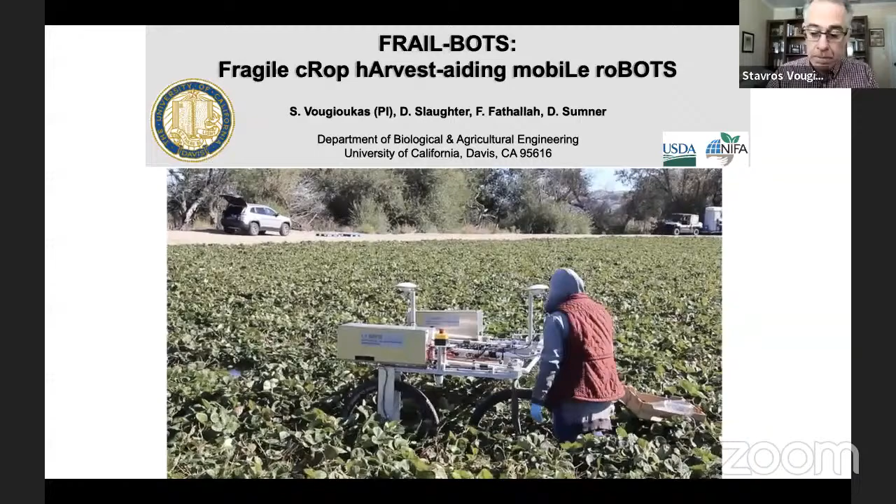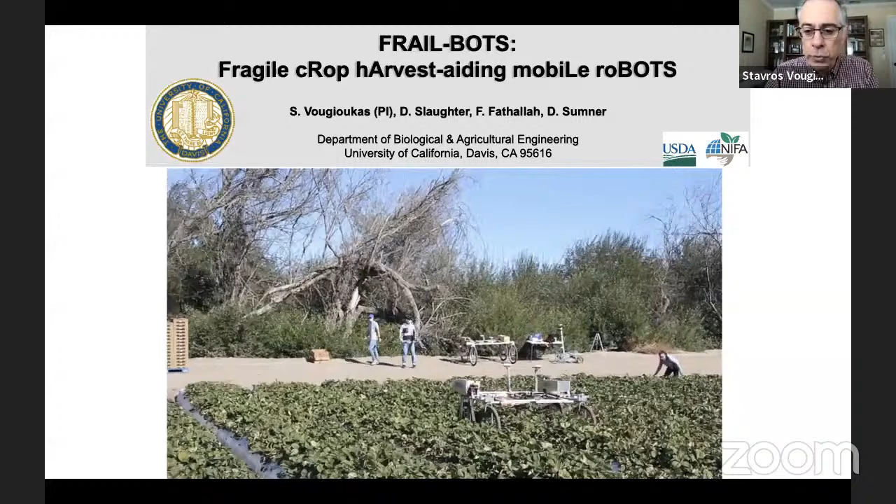They just pick. Now, developing such a system was not a trivial task, both in terms of engineering, but also in terms of software and algorithms. This is a system where basically we exploited the fact that the pickers use a small cart in order to pick. We instrumented that cart so that we could measure the picked strawberries in real time, the weight of the tray. That data was relayed wirelessly to the robot fleet, and then it was also used to create a yield map.

Now, when the field computer received the positions and the weights of all those carts from, say, 40 people, it used a hybrid system model of the picker activities internally and used that model in order to do model predictive stochastic scheduling so that it would dispatch the robots to meet the pickers at the right time and basically reduce the waiting time. Remember here, you may have 40 people picking, but you only have 5 robots, for example. So you really need to be very careful on how you schedule those machines.

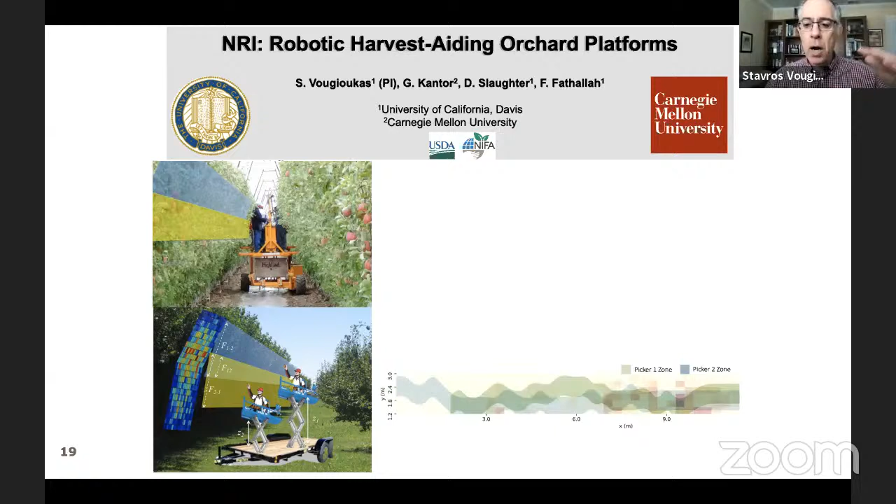So the idea here was to use computer vision to estimate the distribution of the fruits and then robotize this platform so that the computer, based on the demand for labor by the fruits and the supply of labor by the pickers, we monitor how fast they pick, actually positions the pickers the right way and controls the speed of the platform in order to maximize the overall speed of the machine. And so you can see how, as the machine moves forward, the pickers are taken up and down in order for the machine to pick faster.

This is a photo of the system that we built, integrated and tested in orchards. And this is a video showing the actual machine in operation, where we also achieved efficiency gains of up to 25%.

A project we are working on now relates to robotic harvesting, not robotic harvest aids. As I said, perception, reaching, grasping, and conveying are bottlenecks in the process. So we are building a multi-arm robot, and we are programming it using scheduling methods from robotics and operations research in order to maximize the throughput of all of those arms that have to be coordinated. And also in collaboration with Carnegie Mellon, we are using multiple cameras to get multiple views of the fruits in order to better estimate their spatial distribution.

Now, there are lots of opportunities for R&D in robotic harvesting because we really need drastic advances in visibility and perception. Work needs to be done on multi-view imaging, active sensing, creating large data sets, hopefully novel sensing. We also need to do a lot of work on the embodiment design, but also the control of multi-arm robots. Only those robots can harvest tens of fruits per second and thus be cost effective. We also need to design and control novel fruit grippers and conveyance systems, soft robots with compliance that have tactile feedback and dexterity. But like I say, the main challenge will be shown in the next slide.

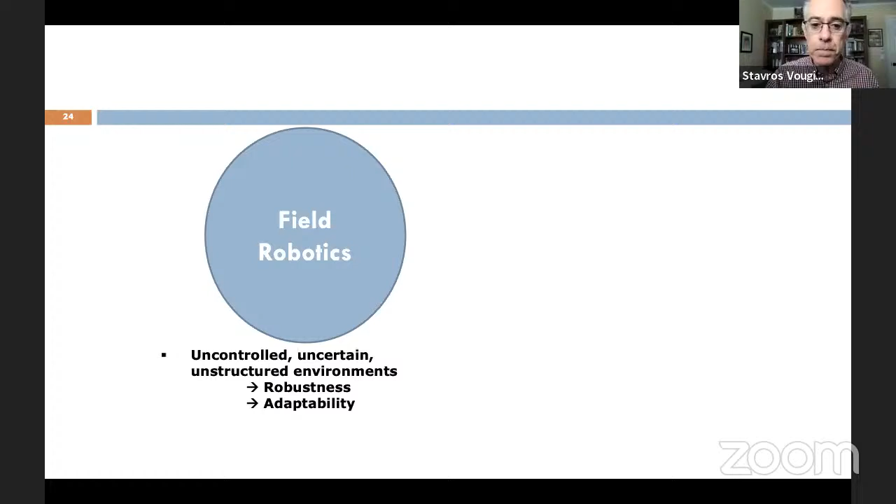Most of these robotic startups will fail, especially the ones that are trying to do robotic harvesting. And the reason is that field robots operate in uncontrolled, uncertain, unstructured environments, and it's all about them being robust and adaptable. Now, on the other hand, hard automation or flexible automation machines operate in controlled, known, and structured environments, but we require from them high throughput and repeatability. Well, the space of agricultural robotics is actually the intersection of these spaces. We are talking about robots and automation.

So these robots must be very gentle, but also be very fast, very robust, very repeatable. And all of that needs to be done in a cost-effective manner because fruits and vegetables are not high value, and also the cost of labor is still very cheap. So this is the great challenge that summarizes what we need to do in agricultural robotics in order to deploy our systems in the fields and come up with solutions to improve agriculture.

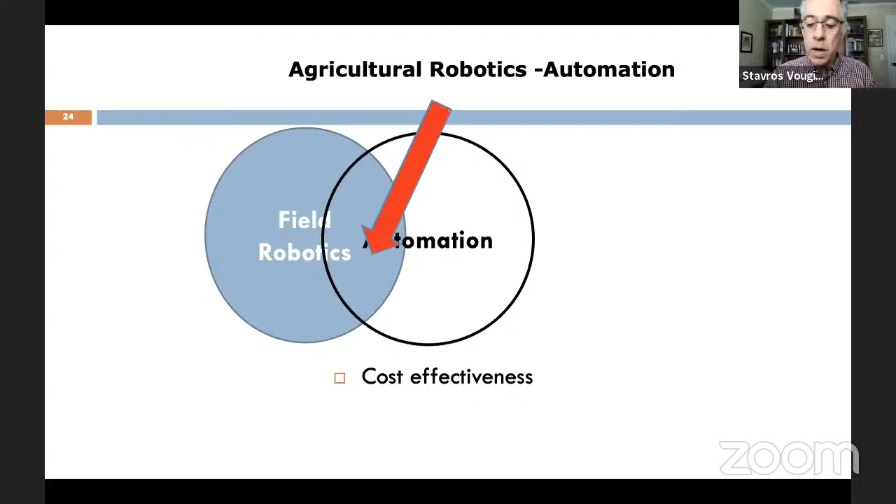Stavros is going to leave now because it's 9 o'clock in the morning in California and he has to go to a class.

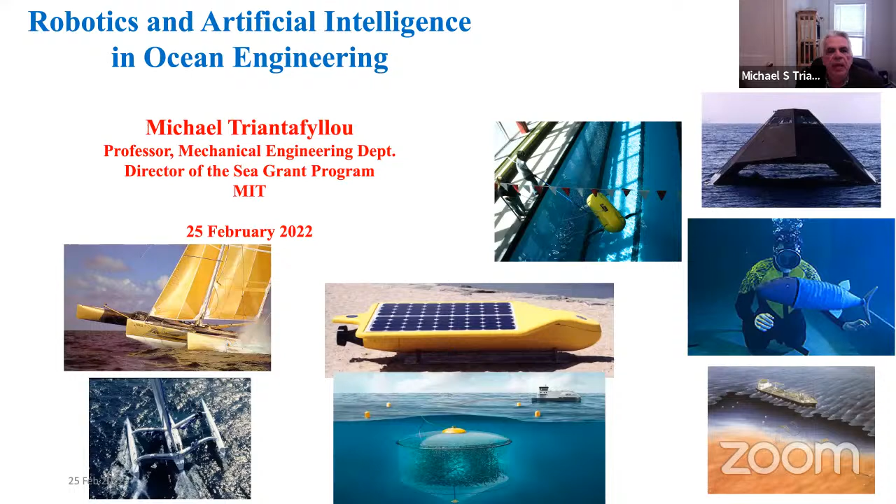Just to give you an idea of how this culture has changed at MIT, a report came in 2015, which pointed out that only 4% of MIT graduates in the 1960s opened a new company, a percentage which went to 8% in the 1990s. And then by 2015, it was 25%. So it's clearly a tremendous change of focus for the graduates of engineering at MIT and everywhere.

MIT is one of many centers for such development. The result you can see, there were about 104,000 living graduates in 2015 from MIT. They had founded 30,000 active companies, which were employing 4.6 million people, producing about 1.9 trillion in income annually, which was just below the annual GDP of France.

So there is tremendous potential, and I would like to take my limited opportunity in the area of ocean engineering, which for Greece is not limited at all because Greece is surrounded by the sea, and there are many opportunities there. So this will be the primary focus today.

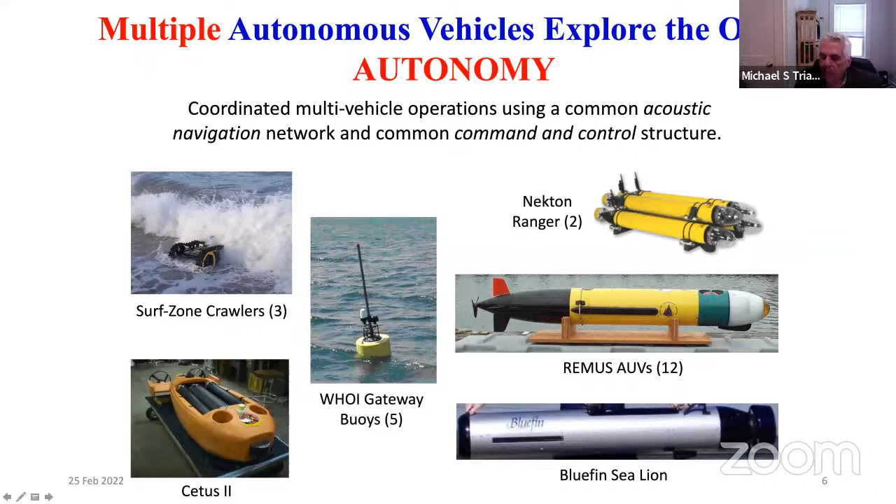This is a very ingenious concept where there is a surface vehicle and a submerged structure. When the surface vehicle moves in waves and the structure at the bottom does not, it produces energy. It's equipped with solar panels, so we can have observation of the ocean over very long scales. And there are several such products right out of Sea Grant that I have observed as they have been created and then grown into larger companies.

So today we are dedicated to autonomy as a concept, and again, concepts such as an autonomous sailing boat, which will be using sails to go for very long distances. A very simple concept, extremely effective, with solar panels to provide the control function, or autonomous surface vehicles to go and collect data, which we need in the ocean, without having to employ humans. So this is an area of tremendous growth, and it will be so for the next 10 years at least.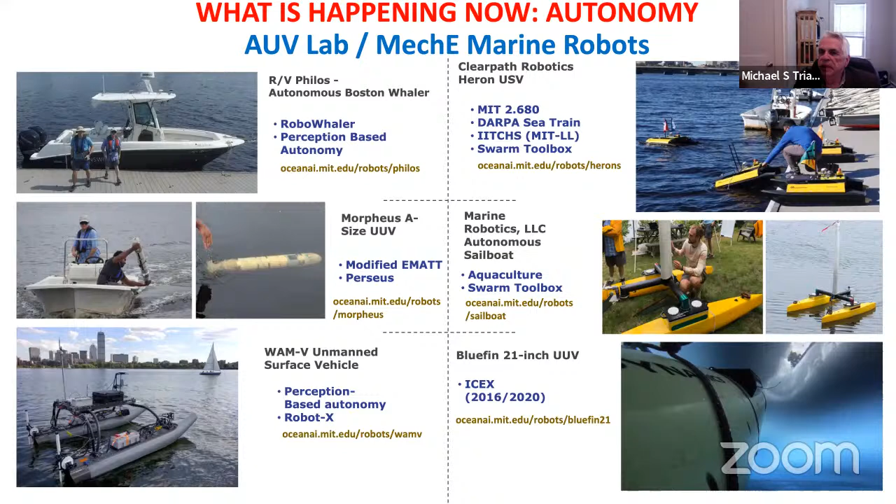The industry for observing the weather is already $7 billion because there is a great need to know what the weather will be with accuracy. So I'm sure this will become a reality in every ocean, including the Mediterranean.

Another area of potential growth for Greece is the decarbonization of ships. Ships have to reduce emissions by 40% in 2030 and 70% by 2050. And this means we have to come up with completely novel designs. Well, Norway and Australia are already preparing autonomous ships which are all electric. So they have no carbon footprint, but autonomy is essential. And you have to remember, autonomy doesn't mean unmanned. You can have a very much reduced crew.

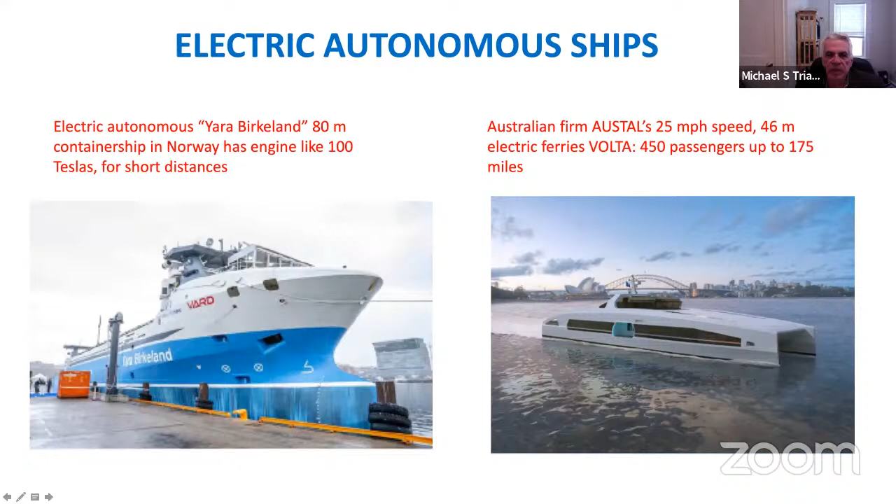So imagine all the ferries in Greece, with distances which do not exceed 150, 200 miles, which is the range of such ships, being replaced by such new concepts. Why leave it to Australia, which is always at the forefront of new concepts? Many of the modern ferries are designed in Australia, and the Norwegians are extremely capable at coming up with such devices. And by the way, there are many concepts to be installed on ships.

Another area which is of tremendous growth is devices to enjoy the ocean. I'll show you a very short clip from a brand new device. I have been involved with the design of some of these devices. This is an electric hydrofoil surfboard, which can fly above any body of water at speeds of up to 25 miles per hour.

The electric hydrofoil surf. This is a great opportunity. We have oceans which are really conducive to the use of such devices. These have come up in the last 5 years, and there's tremendous growth. They cost something like $7,000 or $8,000, and you can go 25 miles per hour, unheard of before, with a simple handheld control.

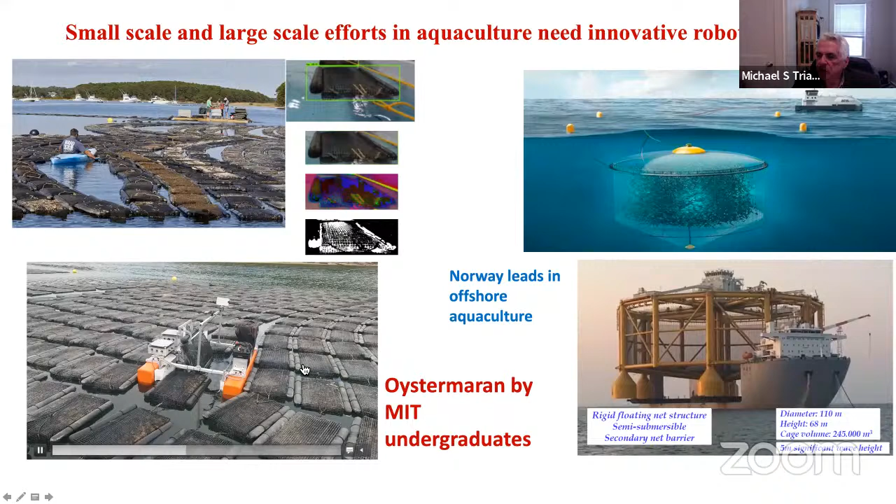There is a special company called SeaAhead, which has a program called Blue Swell, which is just to provide funding for startups in the ocean. On March 2nd, there is the big meeting where they will announce the winners of this time. We need more of these efforts in Greece as well.